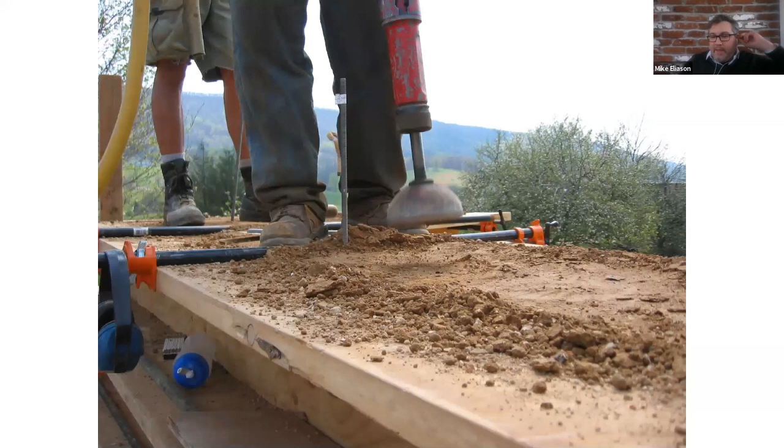But mass timber wasn't really my first foray into sustainable building. In architecture school, third year, there was a design build studio, and we were tasked with designing and building a farmhouse that had burned down. It was an amazing experience. There were about 25 of us out on site every day, filling these walls with dirt, a little bit of cement, and then just compacting the hell out of them. And the end result was actually really quite elegant.

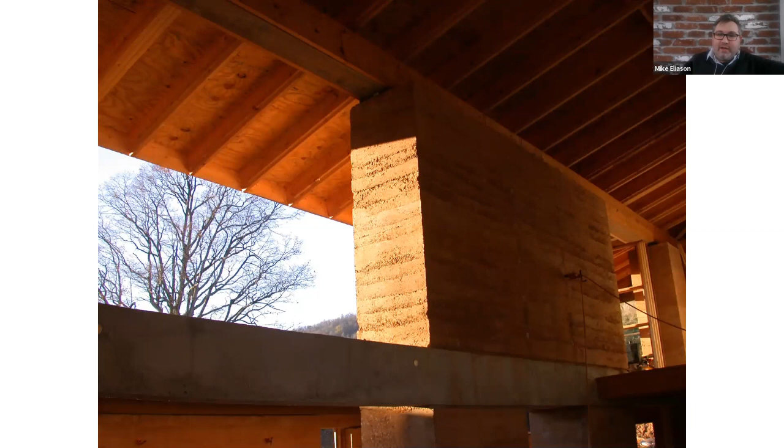I think about this project a lot. Haven't used rammed earth in a long time. There has been a lot of innovation in this field, most of it coming out of Austria and Switzerland, including insulated, prefabricated components that are just trucked to site, very similarly to mass timber, actually.

But enough of that. So in 2003, my 4th year at Virginia Tech, they kick everyone out of the school. There's a study abroad program in Switzerland, or you can go try to work in another firm. And so a friend of mine got me a job working in the lovely little German city of Freiburg, nestled right there at the corner of Switzerland, France, and Germany, for a year. It was an amazing opportunity. It's where I was exposed to Passivhaus, mass timber, Baugruppen. The district of Vauban is 50% Baugruppen. I'll talk about Baugruppen a little bit later, but those are effectively urban co-housing projects.

Freiburg is not a big city. It's only about 220,000, 230,000. There's a university there. It's pretty old and historic. And I actually met my wife in Freiburg. So this place was really foundational to me as a professional and also in my personal life. And I have this yearning to constantly go back. I think that is what drew us to go back to Bavaria 2 years ago.

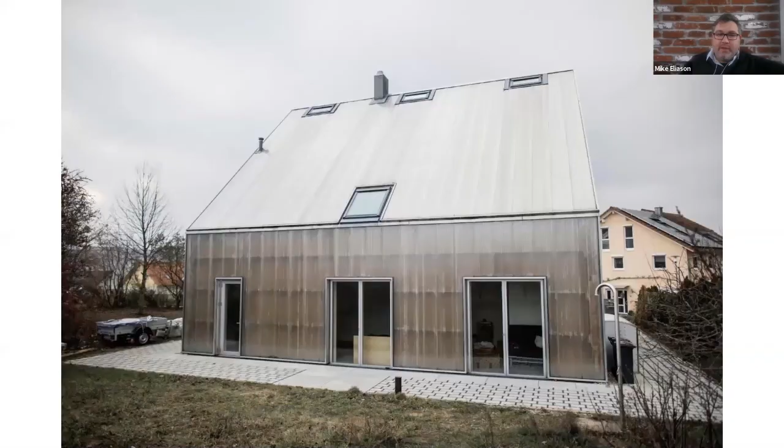So one of the main projects that I worked on in Freiburg was this duplex, and it's a little bit difficult to see, but all of this wall here is polycarbonate with a Dowel laminated timber assembly behind it, and I'll talk a little bit about why that is in a second.

There were also a number of competitions at the time, private commissions that were also incorporating mass timber, as well as several projects that were in design and construction that were using it. It was almost exclusively Dowel Laminated Timber, not CLT, and I think part of that was just the single element, right? So it's just wood, it's just dowels, there's no nails, there's no glue, and so the firm was really kind of intrigued by this.

And so this duplex is basically, you have this mass timber and brick shell, clay block shell, that is surrounded by multi-wall polycarbonate, and it effectively acts as a greenhouse. And what's really interesting is that this duplex isn't two separate units. These are two units that kind of are intertwined, and they have these common spaces within the building where the owners can see each other, navigate around each other, and really dwell, I think, together much more than you would in kind of a traditional duplex where it's two separate buildings.

So the Dowel Laminated Timber would be in the wall assembly here. And so the way this works is, in the winter, the polycarbonate shell, everything is closed off. It's basically like this micro greenhouse, right? It's a solar collector on the facade, and that heat can be pulled into the building. And there's two aspects of this. One, it heats up the mass timber very quickly because it's got a lower heat capacity. And so that warms up, and then that dissipates heat into the building over time. But then the clay block is kind of like the secondary factor. So then the clay block starts to absorb some of that heat and then releases it.

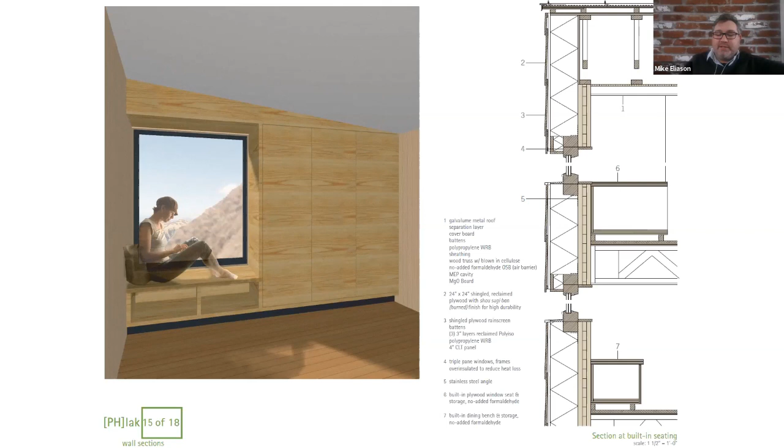And then I ended up at Patano Studio. And Chris Patano is an American architect with an Italian heritage. And we're both just constantly talking about mass timber, the timber industry in Europe, design competitions, which are the primary form of project procurement in Europe as well. And so one year we decided, okay, let's just bite the bullet. We'll do a mass timber Passivhaus school competition entry for Italy. So we took a stab at it.

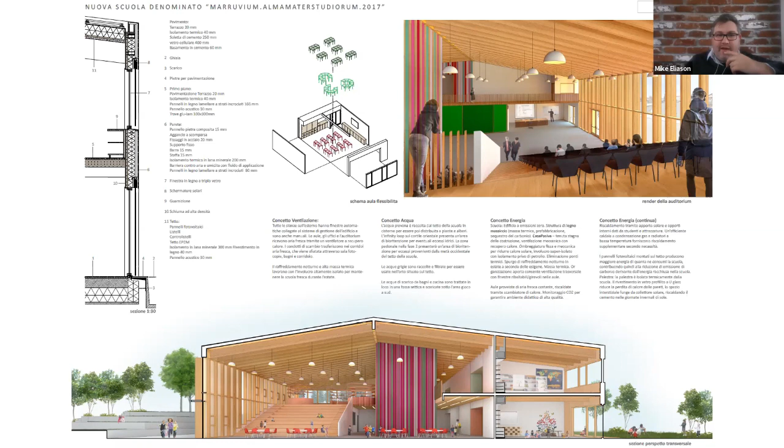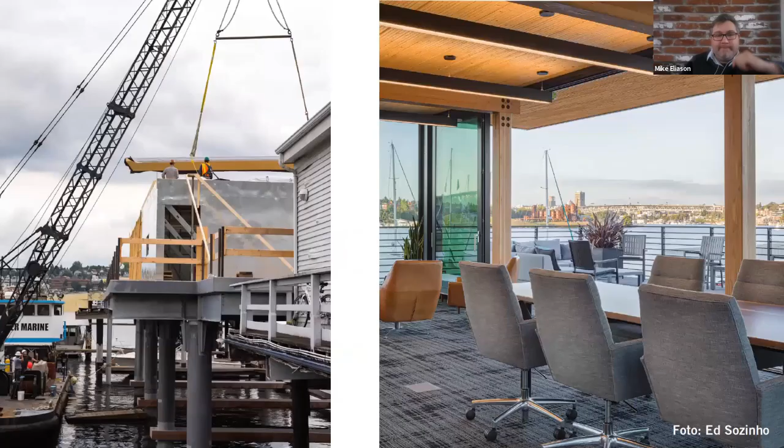And then this is the Dowel Laminated Timber Marina building that we rebuilt. It was initially designed for CLT. At the time, there weren't as many CLT manufacturers in the US. They were slammed, and I think the prices had gone up as well because they were so busy. And so we started talking to the guys at StructureCraft. They were amazing to work with on this project.

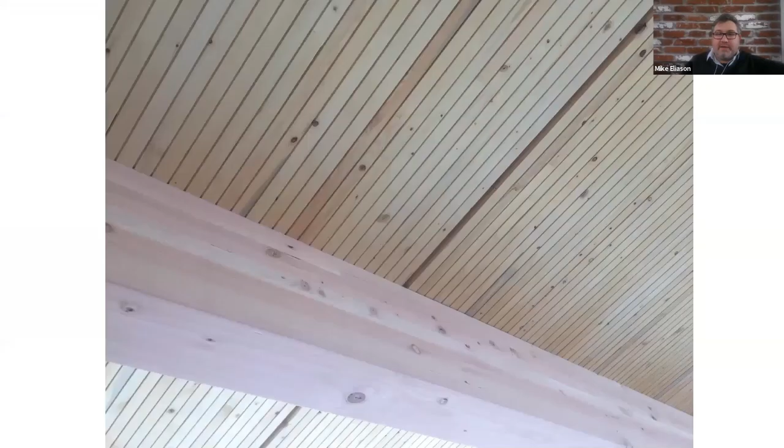The end result, I think, is incredible. I'm a huge fan of DLT. I wish that there were more DLT fabricators in the US so that we could have more options. But StructureCraft is doing amazing work. And this is kind of a close-up, a little bit of a detail of that DLT facade or roof deck.

The one thing that I will say is the DLT panels that we were doing in Germany never had a gap, or if they did have a gap, it was much smaller. And it took me a long time to come to terms with StructureCraft's construction tolerance, not tolerance, but it's just the gap that they require in their panels for movement due to moisture and stuff. But now that I see it, I appreciate it. I understand why it's there, and I can live with it. But again, it was just a really, really elegant product.

So now we'll switch gears, and I'll talk a little bit about Passivhaus. So Passivhaus is a German-ish standard that was founded by Wolfgang Feist, who is based in Darmstadt, and Bo Adamson, who is Swedish. What's interesting to me is that the principles of Passivhaus are actually rooted a little bit in North America, in Canada specifically, but it's a lot of stuff that, you know, the way we used to build or the way that we could have built, and we didn't really follow through.

The functional definition of a Passivhaus: a building for which thermal comfort can be achieved solely by post-heating or post-cooling of the fresh air mass, which is required to fulfill sufficient indoor air quality conditions without a need for recirculated air. What this means is that we're basically supplying the minimum amount of air that we need for hygiene, and that the heating and cooling needed for the building can be supplied solely by that air. Typically, we have large forced air systems to supply adequate heat, so we're actually over ventilating, or we have separate systems, radiant loops, etc., which kick out a lot more heat, or air conditioners on the cooling side.

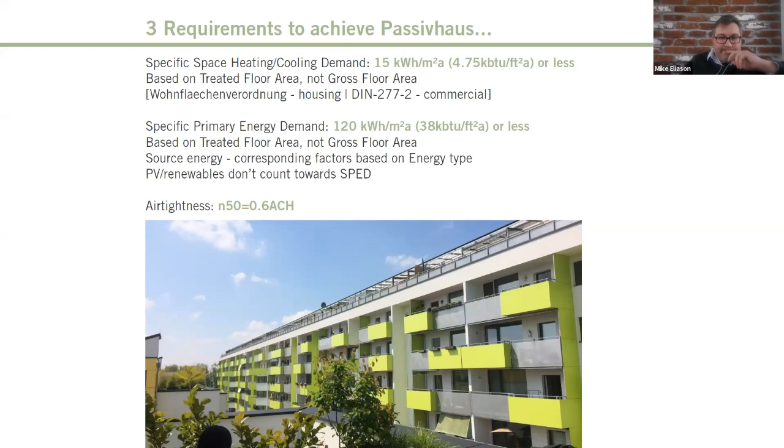And so they have 5 recommendations for how to achieve this. One is Passivhaus windows. So these are triple pane windows. Europe has a long tradition of triple pane windows. I feel like we're still struggling in the US to get even double pane windows that are moderately energy efficient. The other is optimizing your thermal insulation. This is just balancing the heating gains and the heating losses, right? So we're minimizing heat loss through the facade. And there are a number of ways that mass timber, I think, is a really beneficial way of designing and approaching this. There's also the reduction of thermal bridges.

This is one that I think we especially need to watch in the Passivhaus community. This is basically ensuring that when building components penetrate our exterior envelope, there's a thermal break between the two, so that we're not bridging heating or even cooling and exacerbating heat loss. There are maintenance and durability issues with that as well. You can kind of see that a little bit here. They have this balcony, and the balcony is thermally broken from the building and sitting on columns. I would say a good number of multifamily buildings in Europe, especially the low-rise, do this pretty well, and it's more than adequate. The other component is air tightness, and I'll talk a little bit more about that. That's how we achieve our blower door test.

And so when you have a building that is completely closed up, you need to supply fresh air. So the HRV, the heat recovery ventilator, is kind of the lungs for the building. What it does is it extracts the stale air, and while it's extracting the stale air, it's simultaneously pulling in filtered fresh air from the exterior. It's taking the heat, and in some instances also the latent moisture, out of that stale air, transferring it to the incoming air, and sending that back in. So it's preheating or pre-cooling the fresh air from the stale air, so that you don't have to add as much heat or cooling down the line. It also prevents being inundated with colder air when you're getting fresh air in your building.

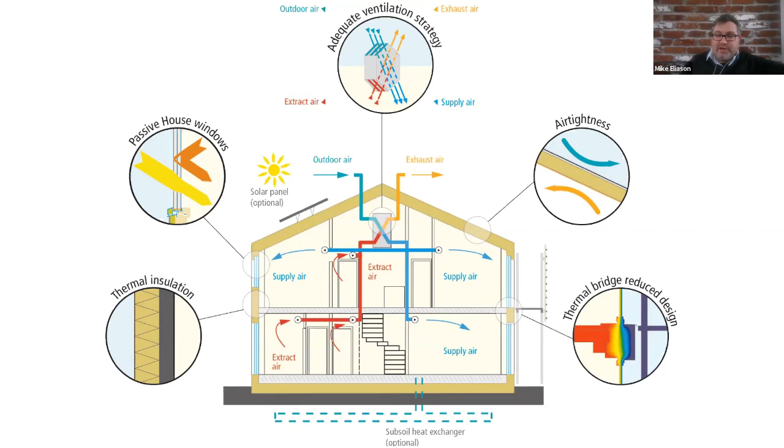So triple pane windows, definitely a component that is required in most of the world. In milder regions, you can get away with double pane. And I'll talk a little bit more about how we figure some of that stuff out.

But triple pane window, vinyl, aluminum, wood clad aluminum, or aluminum clad wood. There are a number of different options. China, I think, now has like 150 Passivhaus certified windows. The US has 2 or 3. And there's a big push for smaller and smaller windows, but you can still get pretty sizable windows in a

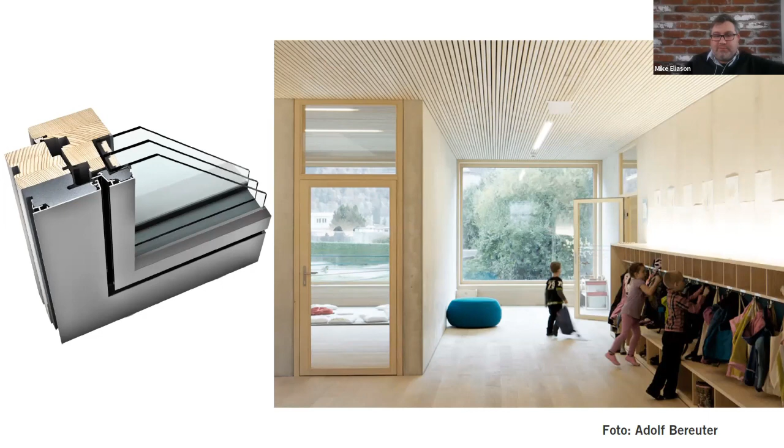Passivhaus. This is a Passivhaus kindergarten in Austria by Bernardo Bader, and incorporates some really interesting components, prefabricated exterior facades, and it's just beautiful. We don't make kindergartens like this in the US, and it makes me sad.

For the air sealing, there are a number of different ways that we can do this. Membranes, tapes, fluid applied weather barriers, and gaskets. This is the Intello, the Proclima membrane, the air tightness membrane, and the Tescon Vana is their airtight sealing tape. And there are other different manufacturers, and they all have similar kind of components and lines.

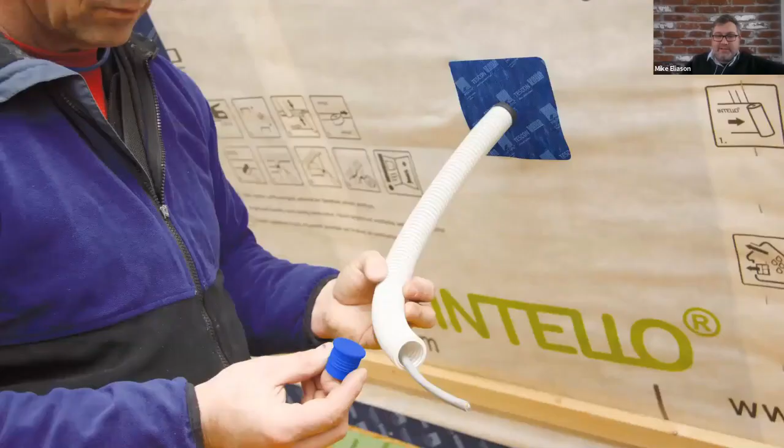Proclima has these really nice gaskets, air sealed gaskets that you can apply. They have just enough room for the ducts to come through, and it's just a really elegant solution.

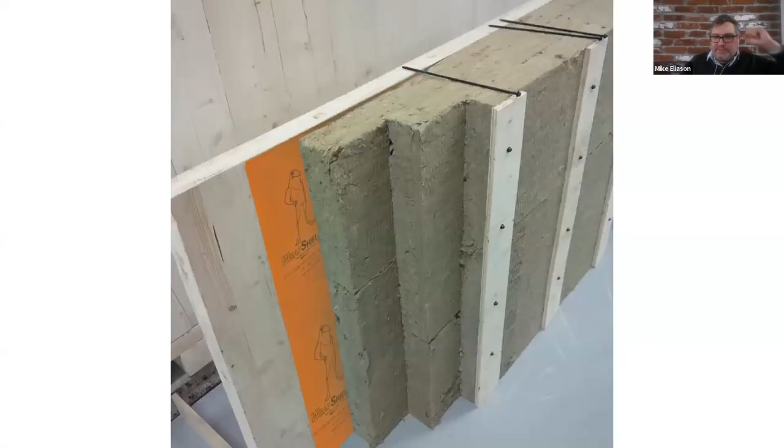This is the optimized insulation that I was talking about, and I wanted to show this picture because I think in the mass timber world, a lot of our insulation is going to be going on the exterior. This assembly, CLT wall, weather barrier. We would also be taping the seams here so that we get our air tightness as well. Exterior insulation. So this looks like 6 inches of mineral wool, which is pretty common in mass timber buildings as well for reducing the fire risk.

And then we're just screwing battens to the CLT, and then we can apply our siding directly to that. So it's a really basic assembly, but I think it's super functional. The moisture risk is really low. The construction sequencing is really not that difficult.

You could install all of these components in a factory, in a dry condition, and truck them out to site. And there are a number of organizations that are doing that now. And I think it's a really smart way to be building.

The thermal bridges are the other thing to be avoided. Number of options available in Europe. Schöck, I think, is the biggest one. They make a number of concrete to concrete, steel to concrete, steel to steel thermal breaks. This one is designed for concrete to concrete. And so you have this cantilevered concrete balcony, and then this is your concrete deck on the inside.

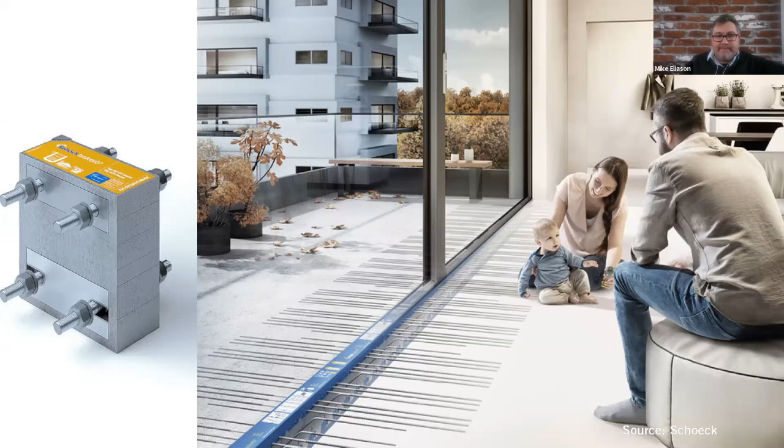So the HRV, I talked a little bit about the HRV. You have this box in the middle, the heat exchanger. The stale air comes out, right? And it goes into that box. The heat from that air is redirected to the incoming fresh air, which is filtered, and then it's supplied to the rest of the building.

So for residences, you're supplying it to bedrooms, living spaces, and then you're extracting from the laundry area, from bathrooms, from the kitchen, just as you would in a normal house. It's a little bit more complicated than commercial buildings, but the way that you do it is fairly similar.

And the HRVs come in a variety of sizes. There's a number of manufacturers. Zehnder makes a number of components that are suitable for retrofits, apartments, houses, and small buildings, or you could use them in a distributed method and have several per building, maybe one per floor. Swegon has larger units that are really useful for commercial buildings.

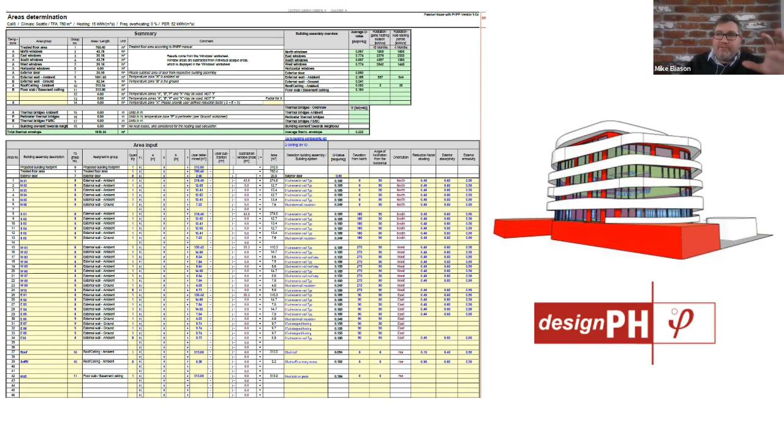makes the process easier. What's really interesting to me is that a lot of people now are using Grasshopper or plugging in to Revit or ArchiCAD or whatever they're using, as a way of rapid prototyping different Passivhaus models, massing models, and getting a fairly quick means of looking at different buildings and how they would work on the same site.

So the blower door test is the other aspect. Like I said, your whole building is air sealed. They'll come through and test the air tightness of the building, and it just has to be under 0.6 air changes per hour at 50 pascals. Another component, this is more of a recommendation, is for a compact building.

And with mass timber, I would say that there are also benefits to building a compact building. There's fewer corners, fewer details to deal with. There's less maintenance, more durability. With a Passivhaus, you get a lot of the same thing. When you have lots of jogs, the building becomes more complicated, the surface area increases, and so you need more insulation to meet the same standard. And so we're constantly striving to make our buildings as compact as possible.

What I love about this picture is that it shows one-story detached houses have a very high form factor. And then my personal favorite, the Blockrandbebauung, the perimeter block, is a super efficient form factor. Your sidewalls to your neighbors are in adiabatic condition. You're not losing heat left to right, basically, in those buildings. And so you're only having to deal with heat loss rear, front, top, and bottom under your slab.

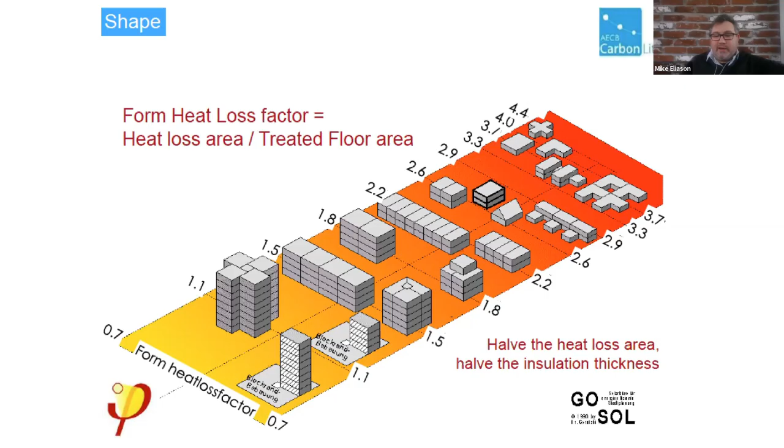So there's a wide variety of ways to approach this, but the compactness one, especially from the mass timber side, from cost effectiveness, durability, things like that, I think is really good. So what are some of the benefits of Passivhaus? Well, reduced energy costs, I think, are a great one. We could talk a lot about the differences in energy costs in different regions and how that plays into the equation. But for me, this is a big one.

Energy poverty is a huge issue, and this becomes a way of mitigating some of that. There are ways of utilizing the energy cost savings to front load the additional costs borne for meeting Passivhaus. Sometimes it works, sometimes it's close. But for me, this is the big one.

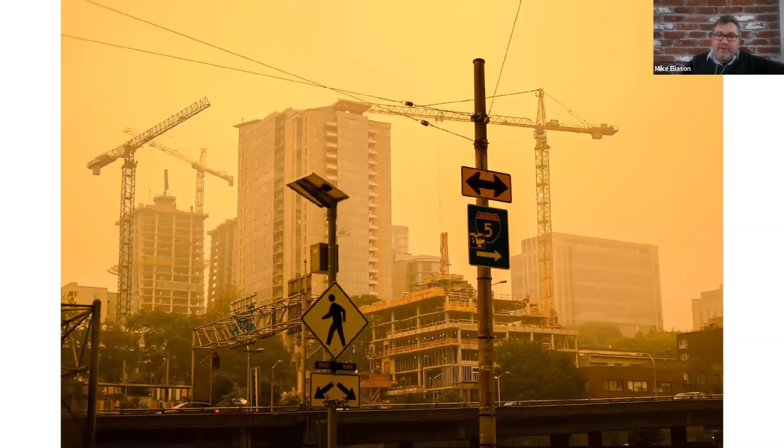This was Seattle last year, probably the worst smoke I've ever seen in my life. This is going to become a bigger and bigger issue on the West Coast, and we're going to have to start addressing the breathability, or the inability to breathe. And not even in my lifetime, but today, right now, we should be preparing for this summer. Like I said, the risk of wildfires is only increasing.

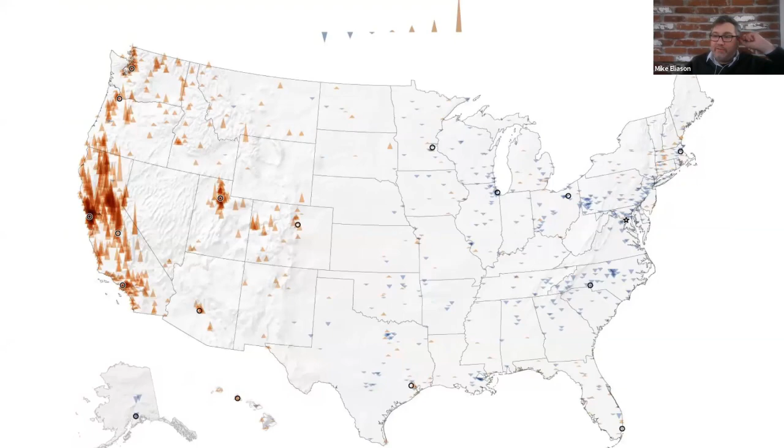Here in the Pacific Northwest, the Cascades are drying out. All of our smoke, for the most part, this year was from down south. It was from Oregon and California, but eventually we're going to start having a lot more smoke locally, and at times we get a lot of smoke from British Columbia as well. So with the filtered HRV, we have at least one path of mitigating the smoke, so that when we're in our buildings, we're not having to breathe it.

We'll have these extended smoke events, and we'll need places for people to go and breathe fresh air. And I really think that public buildings kind of become the catalyst for some of this. The other aspect too is the urban heat island effect. So in cities with climate change, global warming, our cities are just going to get warmer and warmer. And so we're going to have to start figuring out how we deal and live with this warming condition. Passivhaus reduces the overheating versus a typical building.

One of the things that I'm really intrigued by, Monte Paulsen up at RDH in BC, and a number of other folks have been stress testing their PHPPs. So the PHPP is based on historic weather data, but you can go through and you can modify the weather data. So you can basically make it warmer to see how your building would function under climate change, under a changing world. So there's a couple of really interesting things that you can start to do to address that as well.

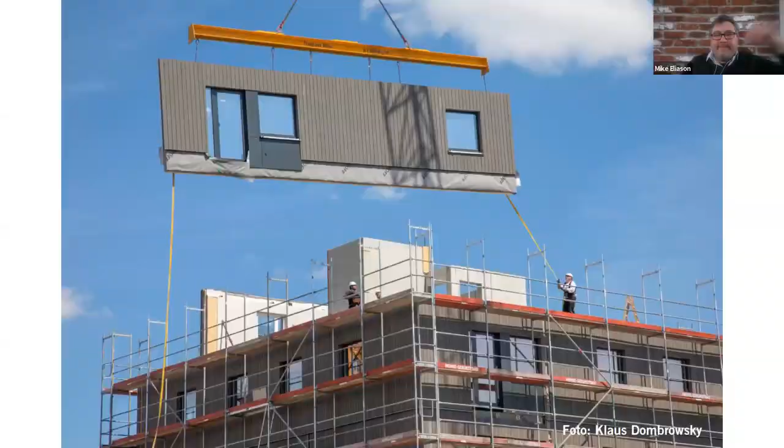I absolutely love them. Another aspect I think with Passivholz, with mass timber and Passivhaus, is that with Passivhaus, your wall assembly is really complicated. It's pretty difficult to build this on site. And so one of the things that we can do is we can build our assemblies for Passivhaus off site. This is also great for mass timber because the longer that our mass timber, CLT decks, glulam framework, et cetera, are exposed to the elements, the higher the risk of things going wrong. And so buttoning up that envelope quickly and efficiently is really, I think, one of the best things that you can do for both. So I think that there's a lot of synergy in working for this as well.

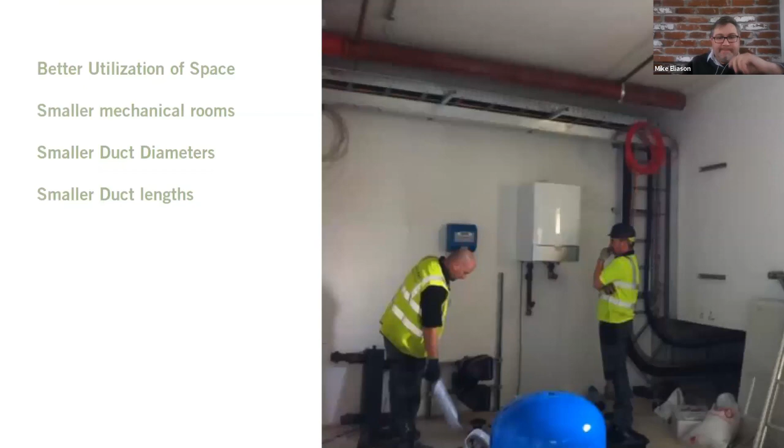There are a number of outfits in Europe that can do things like this. We have a couple of companies in the US that are moving in this direction. And so my hope is that in the coming years, we won't be quite as far behind Germany on this. Another component that I think is really great is that the mechanical rooms in a Passivhaus can be significantly smaller. So this is the heater for a 25,000 square foot school in the UK. I'm working on a building that's twice as big, and our heating system is significantly larger. And so there's space saving

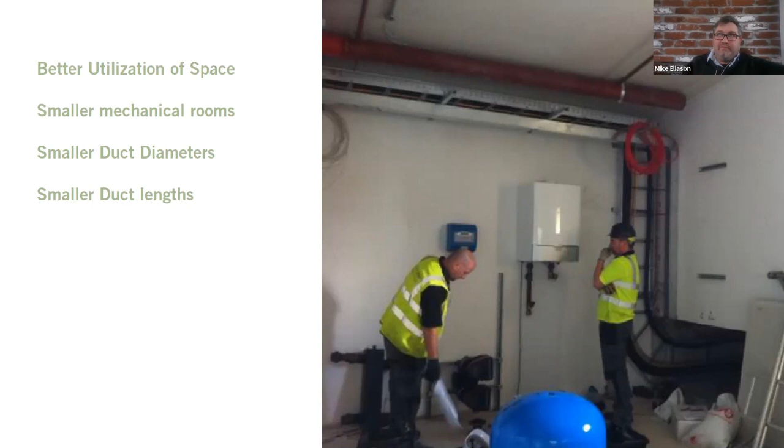possibilities with Passivhaus that I think could be an opportunity in balancing the cost equation. So you have a better utilization of space. Your mechanical rooms end up being smaller. Your duct diameters aren't as large because you're not having to push as much air through the facility. Your lengths aren't quite as long. You don't have to take that duct and push it all the way to the window to prevent condensation and stuff on that as well. So you could have this interesting paradigm where the cost of building to Passivhaus ends up being fairly nominal. And of course, it's also great for retrofits. This is a Passivhaus retrofit in Brussels.

Housing by A2M. I love this. They ripped off the facade and then they came in and put in these new Passivhaus rated components. They added the balconies. The angle of the structure here is designed to optimize the winter sun and block out the summer sun. So it's just a really smart way of working. And again, you can do that in prefabricated mass timber components as well.

So I'll talk a little bit about the value added timber industry in Germany. One of the reasons I wanted to move to Bavaria was to kind of be closer to this. I know everyone talks about CLT and DLT, but there's this whole other world that's going on. And I wish more people knew about it, because I think it solves a lot of the issues that maybe CLT hasn't been that great at solving.

So this is a product by Lignotrend. They're a German company. These really wonderful box beam elements, you can get them as a single box or this gang of boxes. They incorporate the acoustics, thermal insulation, acoustic insulation, fire protection. You can change the material, the wood species, and tune that as needed. They can be used for floors, roofs. It's just a really simple, elegant solution. And you can get a pretty decent span on that as well.

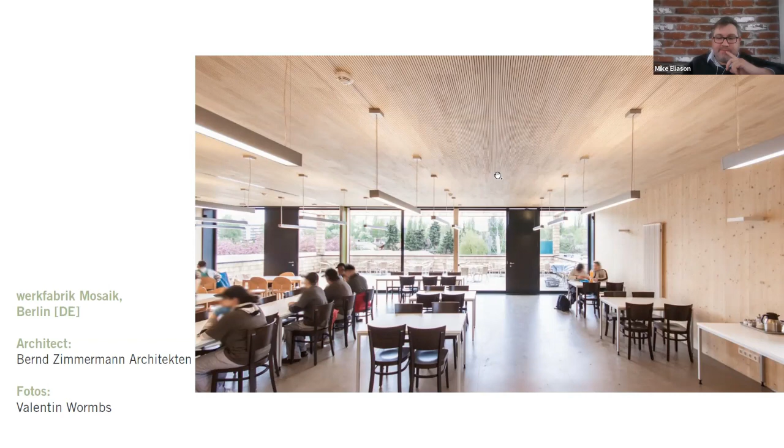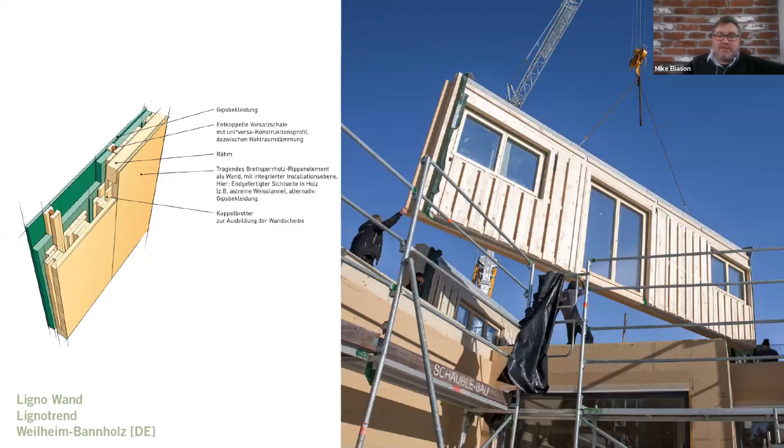They also make a wall element that's fairly similar. Again, so it's like using CLT, but it's not using as much wood. There's space for running the services as needed. It's a really simple and elegant solution.

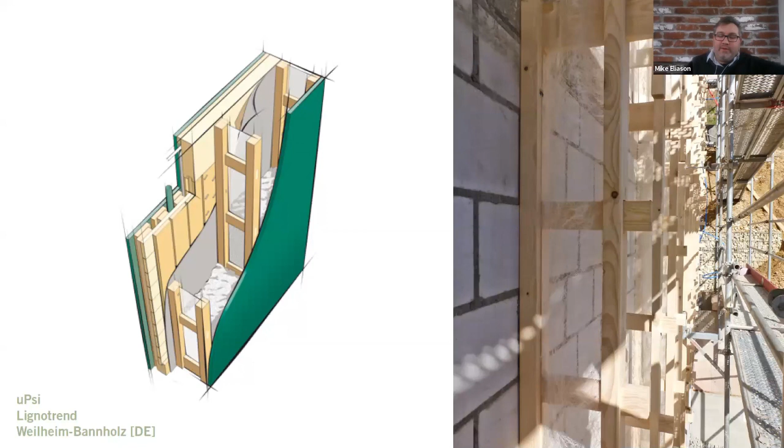They also make this product called uPsi, which are prefabricated Larsen trusses. A Larsen truss is basically two 2x4s, and then you have these members running between them to separate it. You can use these for retrofits of existing buildings or for new ones, and then you're just packing insulation in those cavities. And so it becomes this really interesting way of building these low energy, low embodied carbon retrofits as well. I'd love to be able to go down to Lowe's and pick something like this up.

And so while we're talking about decarbonization, my buddy Andrew Michler talks about this pretty effectively. Is mass timber enough? I'm a little bit leery about the carbon sequestration of mass timber at this point, to be honest. I hope we start seeing more LCAs that talk about it, but I think that we can talk about having lower carbon footprints versus concrete and steel, and we can also talk about decarbonizing other materials in our building.

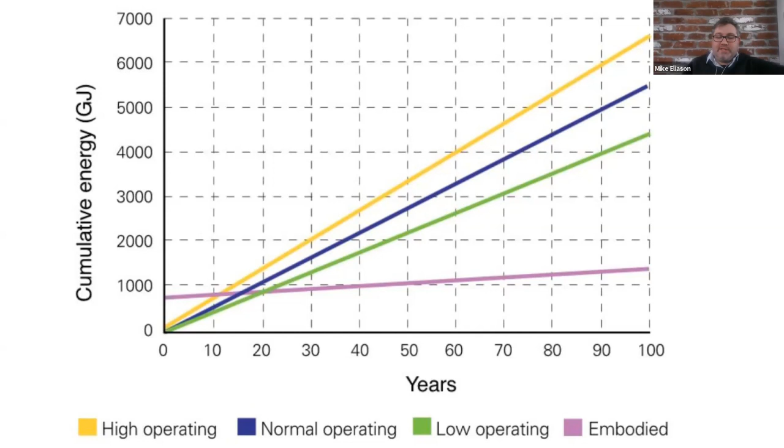So as our building ages, it requires maintenance, renovations, things like that, new mechanical systems. So our embodied carbon, embodied energy aren't static. They're also changing as well. And it's the same with our energy flows. So a low energy Passivhaus building would actually be using less energy over time versus the standard energy use of a building. So it's important that we not just reduce the amount of energy that we're using, the amount of carbon that is produced in that, but also that for the building itself we're addressing those same things.

And so there are a number of products available in Germany that have a fairly low embodied carbon. Steico, Gutex, a bunch of other firms. This is basically a byproduct of the timber industry, and they take these panels and fabricate them with compressed wood fiber, and it acts effectively like a rigid insulation, but it's made of wood and a couple of other materials.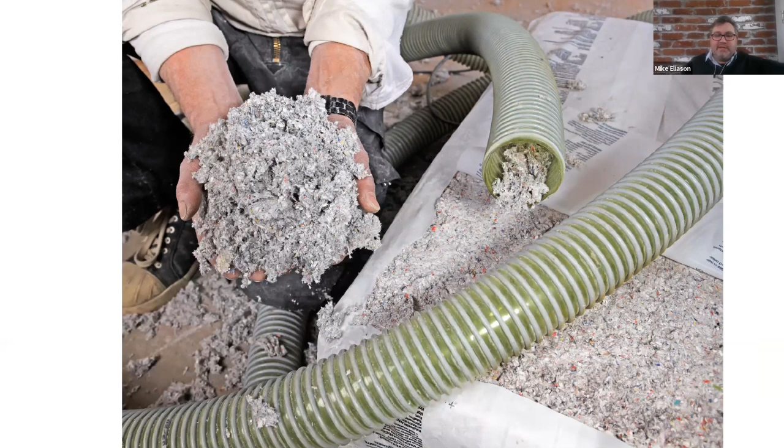Steico also has a blown-in wood fiber insulation, which I think came out a couple of years ago. Again, just like completely blows my mind what it can do. This is similar to cellulose, but again, it's a byproduct of wood fabrication. Cellulose, we can get this in the US. It's been around for decades. Really great low embodied carbon products. I try to specify this on as many projects as I can.

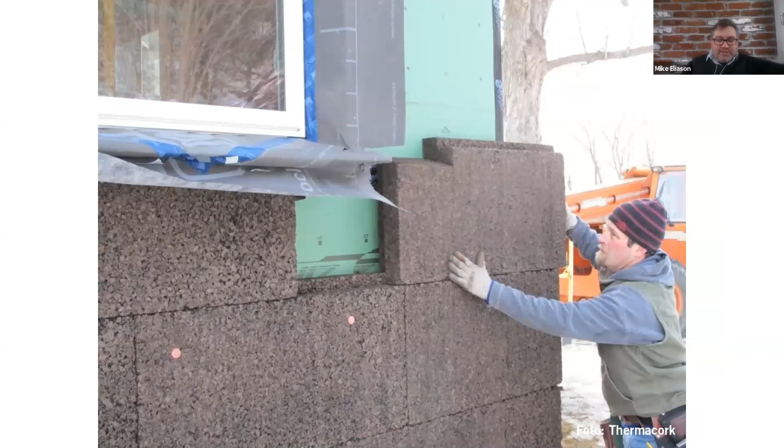Another really interesting product that came around a couple of years ago was Thermacork. So the cork industry has had a problem as people have moved towards plastic and metal caps for their wine bottles. The consumption of cork stoppers has gone down significantly. The issue is the trees are still producing all that cork, and so the cork has to be harvested off of the tree, otherwise the tree will die.

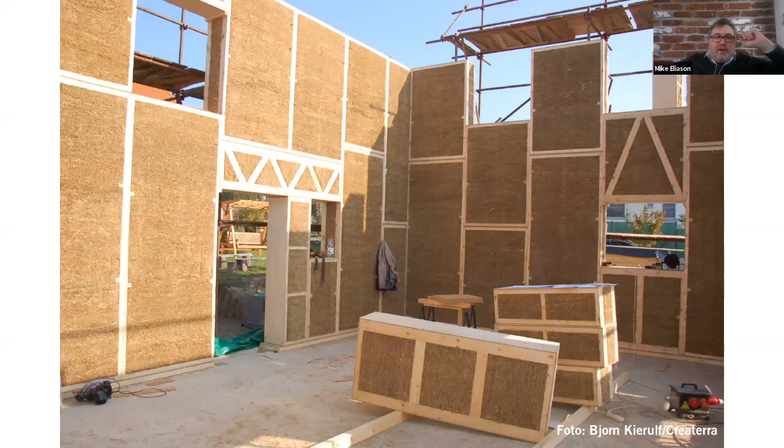So there's a company in Portugal that basically takes this excess cork and they have a process of heating it and making these thick panels that can be used as we use rigid insulation on a facade, or it could even be an exposed element. So it becomes two things, right? It becomes your siding and your rigid insulation. It looks a little bit weird, it smells a little bit weird, but I think it's a really elegant product. And then another product that's really great is EcoCocon.

Hold on just one second.

This is a straw panel that's manufactured in Lithuania. They're licensing it to be fabricated in other places as well. Thermally broken, low embodied carbon. You could conceivably use this in multi-story buildings as well. So I think it's a really, really interesting and elegant solution to this decarbonization issue.

And so a little bit about me. Presently, I am in the process of trying to figure out how to build my own, hopefully mass timber, multi-story passive house housing. I've been fascinated with Baugruppen since I lived in Freiburg. Baugruppen are effectively co-housing, right? So it's a bunch of people who come together and build their own housing. We're looking at staying in Seattle. For the size, it'll be about 20 homes, a variety of units and sizes.

So right now we have this issue in the city. Everything is really, really small studios, maybe one bedrooms in one building, or expensive, really unfunctional townhomes would be the alternate. And so you don't have this in between. So we're really thinking, okay, can we occupy this space? Is there a market to build moderately affordable urban housing for families like mine? We've had a lot of good feedback. We're talking to some banks, and hopefully we'll have a little bit more to talk about that in the near future.

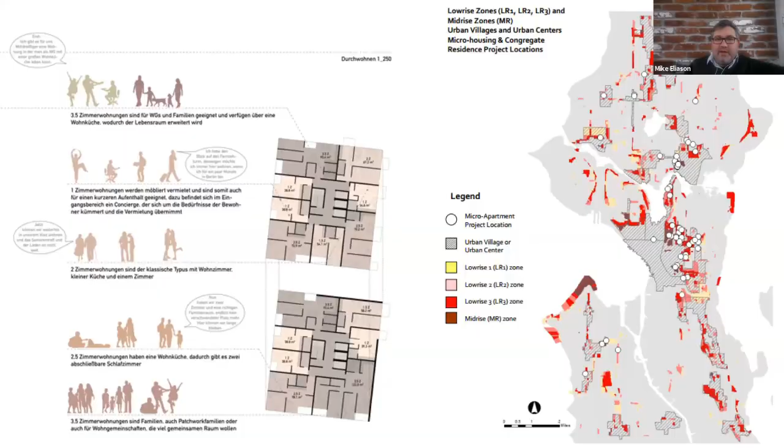The issue here in Seattle is there's not actually that many places that you can build multifamily housing, and that's because our zoning effectively looks like this. So most of the city is detached houses, so it's not permissible to build a 20 unit, 3, 4, 5-story building. And then we stick all of our multifamily housing on these loud, dangerous, polluted arterials. So as a father of 2 kids that love to play outside, it kind of kills my soul that we don't have these quieter places that families can live.

And again, going back to my time in Europe, right? I'm fascinated by density, by car-free areas, pedestrian zones, and green mobility. And so that's where I'm going. But what about where the industry is going?

Oh, sorry. And then these are just some of the books that have been influential for me on Baugruppen. So Co-Housing Inclusive by ID22, Michael LaFond, who's a Baugruppe cooperative housing guy in Berlin. The Building and Living in Communities is from an exhibition on communal cooperatives in Zurich a couple years ago. Das Wiener Modell, the Vienna model, really, really elegant book on social housing in Vienna.

And then Self-Made City, Kristien Ring's book with a number of case studies on just incredible Baugruppen in Berlin and surrounding areas. It's just a lovely book.

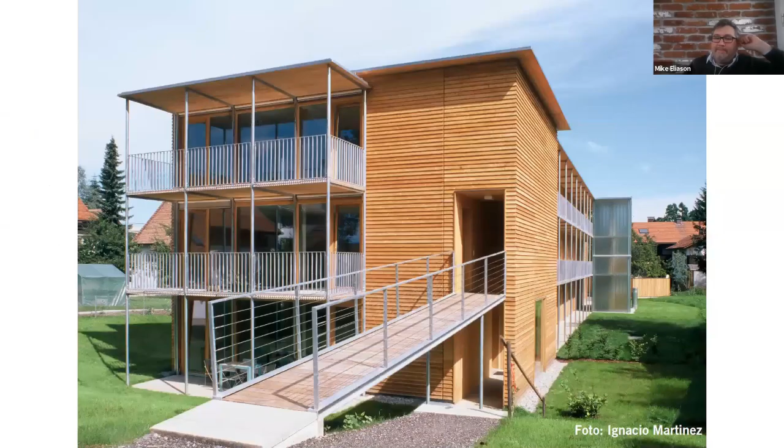Yeah, so where are we going? As an industry, this is a prefabricated mass timber passive house, compact form. It was built in 1997. This is Hermann Kaufmann, decades before he was doing the CREE or consulting on the 18-story building here at UBC. So we've had this technology for quite a while.

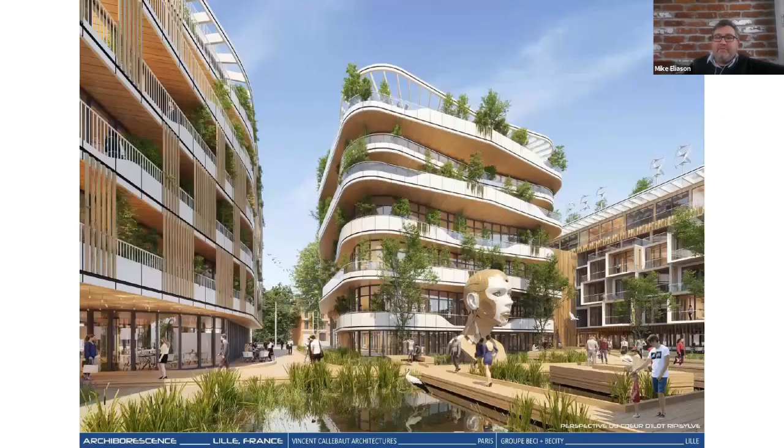So maybe we'll start to see more of it. I'm really fascinated right now with Vincent Callebaut, a French architect, and his kind of dense mass timber vision. Again, open space, density, low energy buildings.

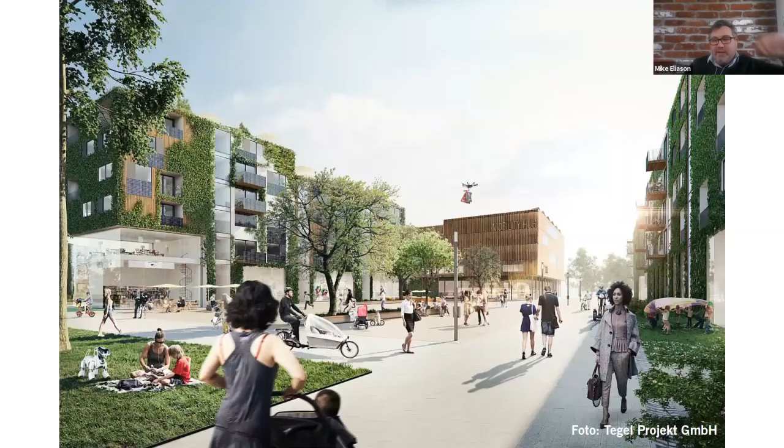I'm extremely fascinated by this. The city of Berlin is about to have this huge mass timber passive house eco district in Tegel. It's the Schumacher Quartier. Again, 5,000 homes, multi-story buildings, lots of open space, mobility hubs for facilitating car-free and car-light living. This is really a way of planning that we don't have in the US or North America.

And I think that we're going to see this thing in Europe where we're already seeing it. Districts like this are going to start popping, and they're going to be just incredible places to live, I think. The low energy buildings, mass timber buildings, biophilia, and we're maybe getting 1 or 2 buildings that are mass timber in a district. We don't have mass timber districts anywhere in Washington right now, or I think anywhere in the US.

And so, how do we incentivize and facilitate this kind of living, this kind of construction, is a big question of mine right now. I'm also really fascinated with the Open Building Co. in the Netherlands. It's a group of Dutch architects who have gotten together and developed their own manifesto. So it's around circularity, design for disassembly. A lot of these buildings are moving towards mass timber, very open floor plans.

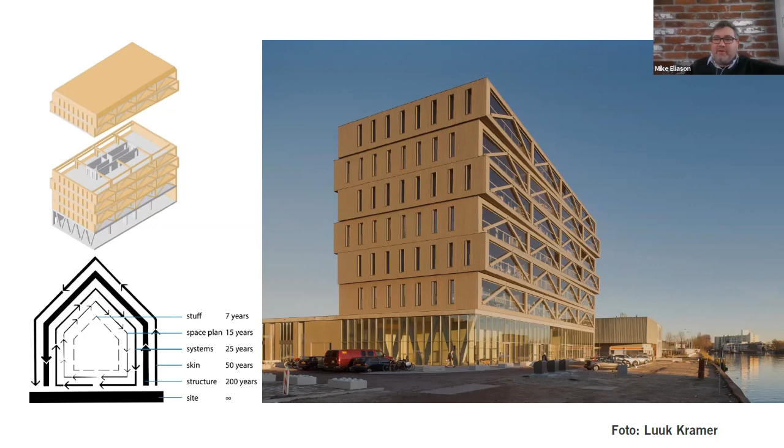So this idea that the building is going to be around for 200 years, right? The structure is going to be there for 200 years. How do you design moderately affordable multifamily housing in urban conditions that can start to accommodate a lot of these questions? So I think that they're doing really incredible stuff. I think everyone should start stealing their ideas and incorporating them in their own work. It's just fascinating to me.

So where do we go from here? Well, I think that the component-based stuff like Sidewalk Labs is probably the future, and I imagine that in the next 10, 15, 20 years, a lot of what we're going to start seeing is this kit of parts, components-based stuff, and mass timber definitely works really well with that. Passivhaus is easily incorporated into that.

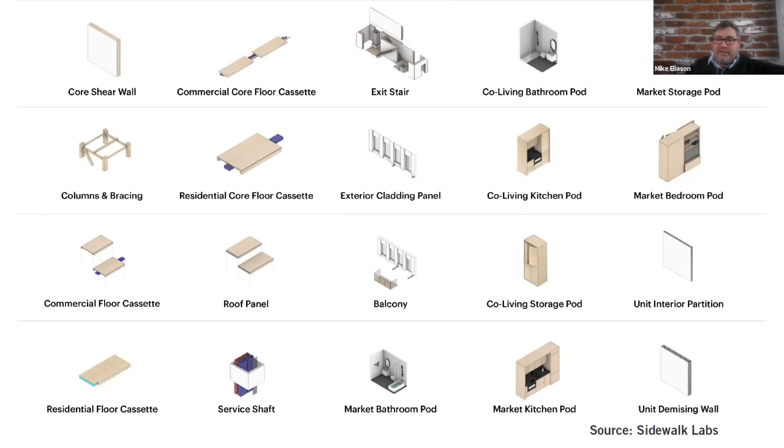And so I really see that that's kind of the direction professionally that I see myself going in, and I think that the industry as a whole is going to start finding itself there, and that's where a lot of the innovation is. It'll probably end up being where a lot of the cost savings over time are as well. So that's what I've got.

How are we doing on time, Greg? We're doing great. You speak quickly and cover a lot of territory, which is wonderful. Are you finished? Are you ready for questions? Yeah. Okay, great. Let's do it.

First from Aaron Schiller. How does the polycarb do with acoustics during rain, etc.? That's a good question. I imagine it doesn't do that well, but it is multi-walled, so maybe it performs a little bit better. Like I said, I've never been to that place since it was finished being constructed. But I think it's something that you just live with, right? Like you live in a house with a metal roof, right? Sometimes you kind of live with it. So it was definitely a unique thing.

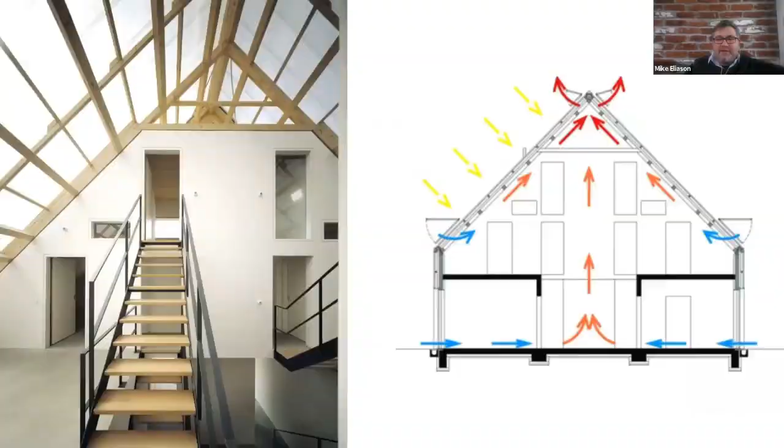And if I go back to the picture, there are some potential building science issues in this as well, right? You can see streaking. It looks like some moisture issues or condensation that could be building up in that panel as well. So it's definitely different. I wouldn't do it, but it's what the client wanted.

A question from Mark Devereaux. I'm curious about the combination of Passivhaus, mass timber, and disassembly. With all the adhesives, need for air tightness, etc., how does it impact the ability to disassemble and reuse at end of life and the associated reduction of waste? I think this is a really good question. I was thinking about this last night.

So there are a couple of different ways to approach air tightness. One is with membranes and tapes. Another would be with the fluid applied membranes like Prosoco. That stuff works really well, but if you're talking about design for disassembly, it's not the best. Maybe you can take that wall panel and reuse it somewhere else, but if you've sprayed your mass timber assembly with Prosoco, that stuff's not coming off anytime soon.

So I look at other projects that have done this in the US and the EU. It's mostly gaskets, so the tapes can come off. You could, I guess, effectively remove the blemishes from the adhesive from the tape over time when you've taken it off. But it is an issue.

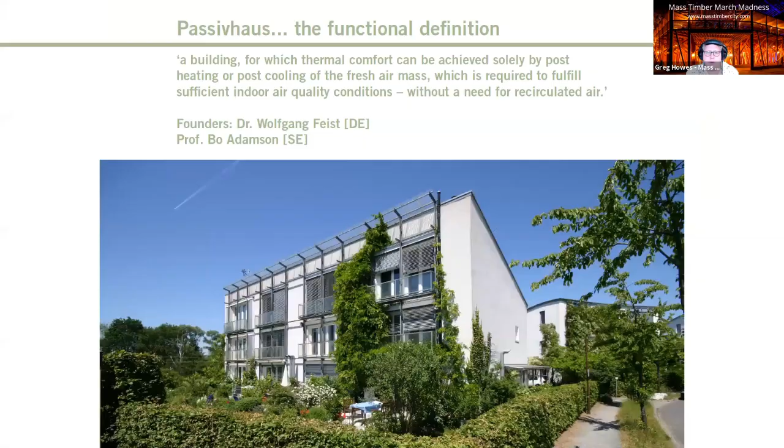Next one is Adam Slivers. Regarding the hollow cassettes, Lignotrend, what kind of fire protection materials are used? Are they loose fill? Tall wood provisions in 2021 IBC are focused on GWB, which is labor intensive in concealed spaces. I believe it's not loose fill. I think it's rigid mineral wool situated in the boxes.

This is a huge issue of mine right now, the disparity between mass timber buildings, especially on the tall side, between Europe and the US. The encapsulation requirements here, I think, basically make building mass timber over 85 feet look weird. But you look at Vienna's HoHo tower, the CLT decks, the columns, all that stuff is exposed. I think the same with Mjøstårnet in Norway.

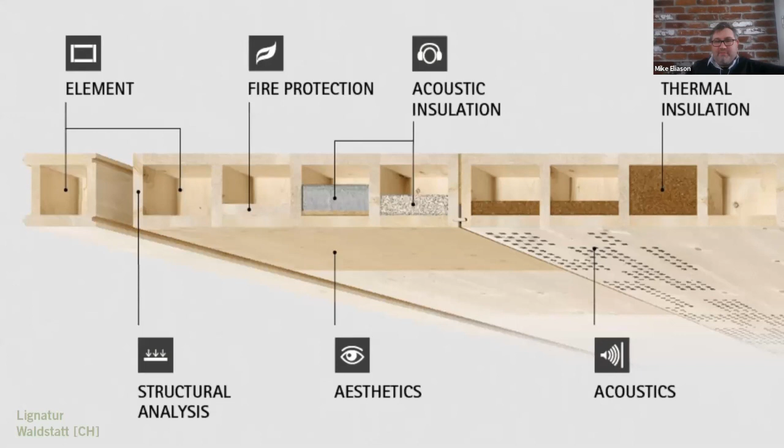And so you're going to have this weird disparity where tall timber in the US can be done, but you're going to lose, I think, a lot of the amazing benefits of mass timber that you'll be able to enjoy in Europe. So hopefully there's a way to, over time, synthesize those two. I don't know if it means we adopt Euro norm codes, but it is a significant issue.

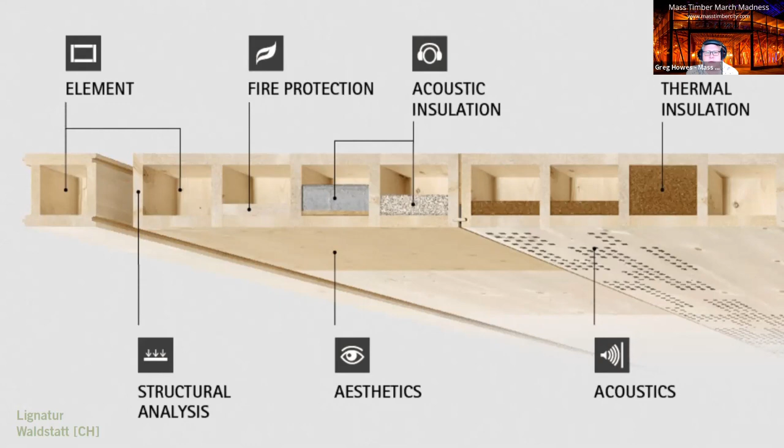Okay, Lloyd Alter asked, what is the cost comparison for those cellular floors? There's more work, but less wood. Do you know what he means by these cellular floors? I'm guessing it's these. I would imagine it's a little bit less expensive than CLT. There's less fiber. I think the spans are pretty comparable, but that's a good question. I'm not quite sure.

Okay, Mariam Farzan asks, some passive houses perform very well during winter, but can be uncomfortably warm during summer months in a European context. What is your recommendation to deal with this problem? Oh man, this is a good one. The overheating in a passive house, especially in summer, can be an issue, especially if it's not, like I said, stress tested in the design phase.

In the US, it's really easy to add cooling. In Europe, especially in Germany, I think only 3% of homes have air conditioning, or 4% at this point. So the cooling issue is going to become a bigger issue, and it's going to require low GWP solutions for the coolant as well. That's a good one. I would say stress test your PHPP. Look at maximizing your shading so that you're not getting a lot of direct sun or even indirect sun in the summer months. Use cross ventilation, night cooling where possible.

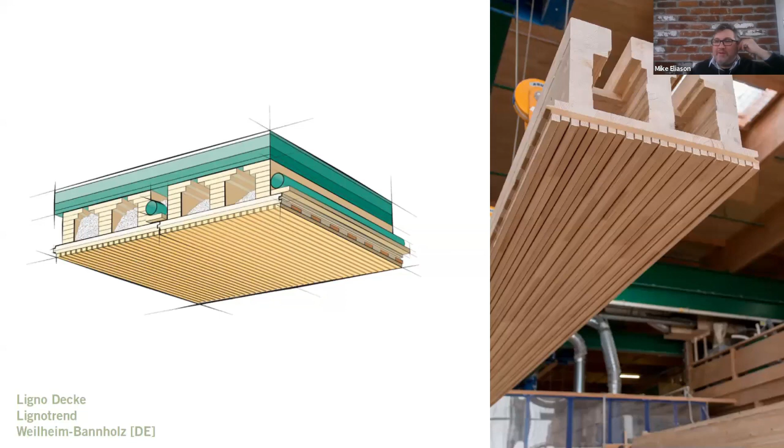This is a really good question. This is part of the reason that we moved to Germany, was I wasn't sure that the possibility would ever happen here for a lot of these things. I think it's the cross-national cooperation. We need a platform so that the Swiss, the ETH can talk to people here, so that people here can talk to the Finns or the Norwegians about their mass timber districts.

Europe is pretty good at knowledge share within Europe. And we're not very good at knowledge share here in the US, I don't think. We all kind of build these silos. And so having this kind of cross-national, cross-industry platform, to me would be a really good educational tool that you could point to.

But a big issue I think that we have is we don't have built examples to take people to, right? We don't have a single mass timber public building in Seattle. We don't have a single public Passivhaus project in Seattle. We have one Passivhaus multifamily project in Seattle. So it's really difficult to say, hey, look, this is the future of construction, without having those examples locally that people can see. So it's a difficult question, but I think that navigating the right solution would definitely open up more discussions.

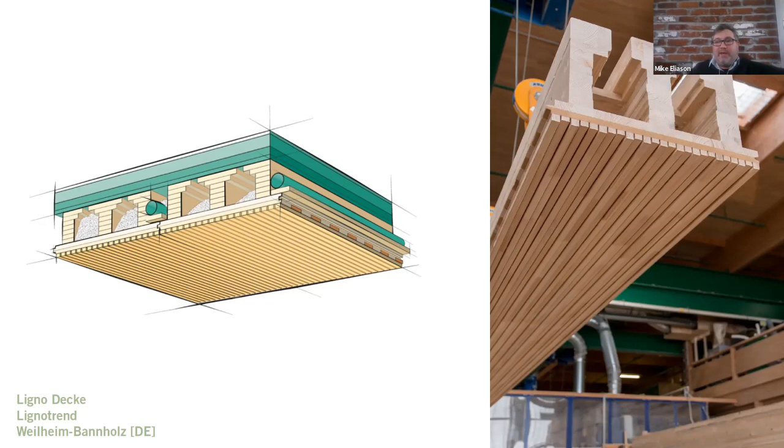The translation thing too is really difficult. There's so much good information. It's only in German. I don't have any time to translate any of it, but maybe there's an entity out there that would be willing to translate it so that people have access to it. That's the only way I know about most of this stuff, is from reading German reports and articles.

Thanks for that. I'll leave with that, then ask the audience. There is a need, I agree with you, for an organization, or why aren't we connecting virtually on the web? I had Peter Finholm speak about the Nordics as an earlier presenter, and then we'll be covering this topic on Saturday after the keynotes in a panel.

But certainly I'm interested, and I bet you are as well, in an organization that actually has board members and advisors and participants from the EU, from North America and other countries, who see business opportunities in sharing that information and in forging those connections, because almost all existing wood and timber organizations within Europe and the US don't have membership across both continents. Yep. So hopefully we can help make that happen.